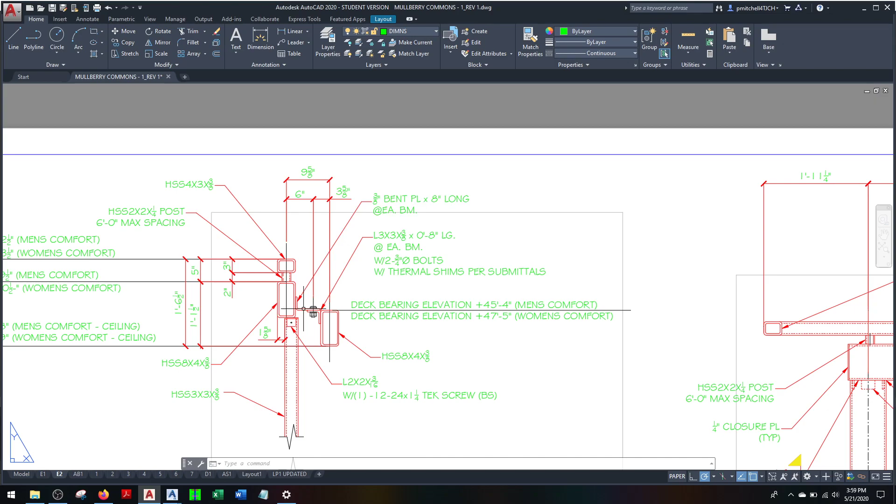I remember this one because they had a complicated thing right here. The way they designed this and the elevations with all the different tubes and bent plate angles and the little stub, it was confusing. But it was pretty intricate. It was all tube frame steel, everything was tubes.

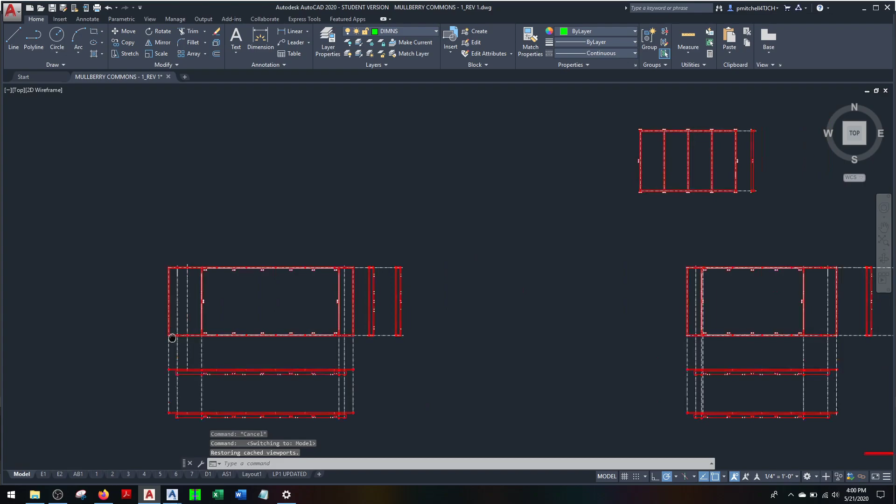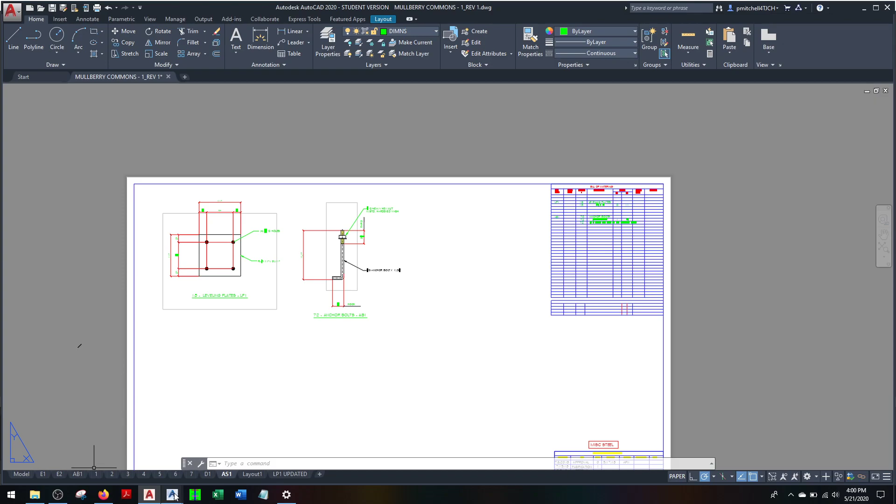I'll just zoom around a little bit. I had another one. Oh well, the 3D modeling.

This was a baseball field. Again, I was getting myself acclimated with doing the modeling.

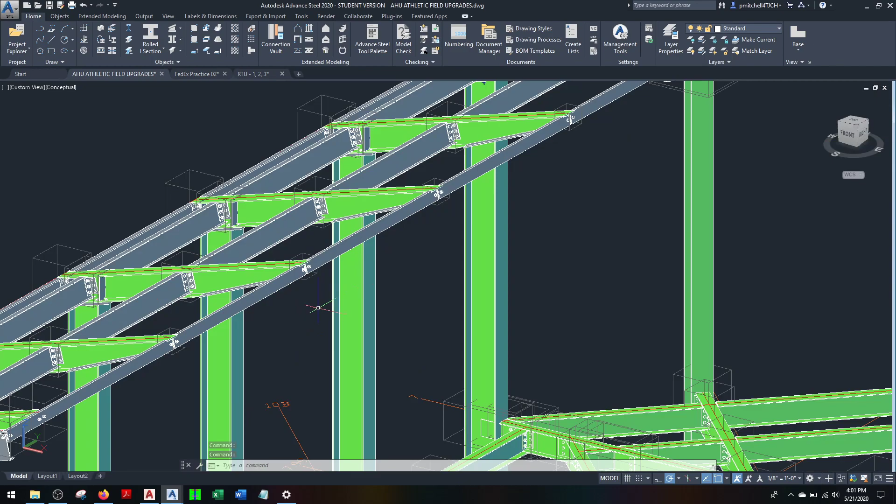This was one of the universities in New Jersey. They were building a new baseball field, so I thought I'd take a stab at modeling this thing. It was pretty interesting, definitely unique. A lot of custom connections, and the beams were beveled or spliced.

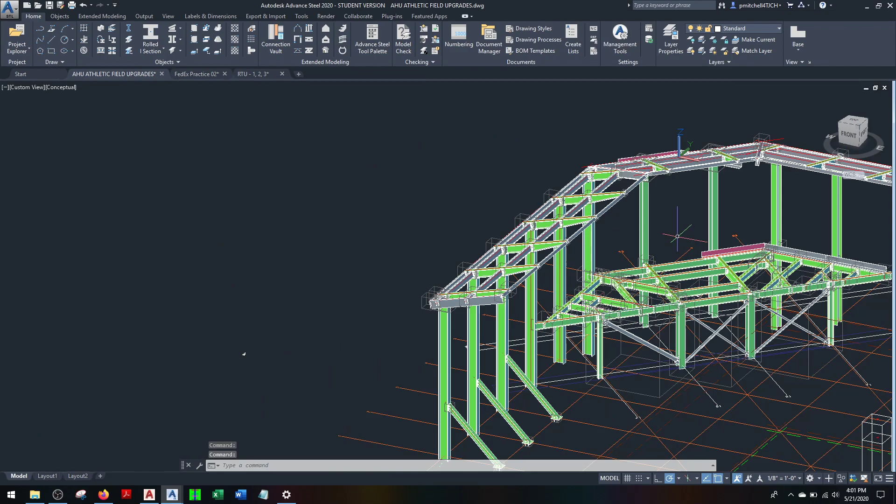I'm not sure what you're gonna call that. And then there's a plate welded at the end. And then I was trying to figure out, in the modeling, how do you have the bevel or the splice for the bent plate at these. I think it was like a 45-degree angle there. So this is what this was.

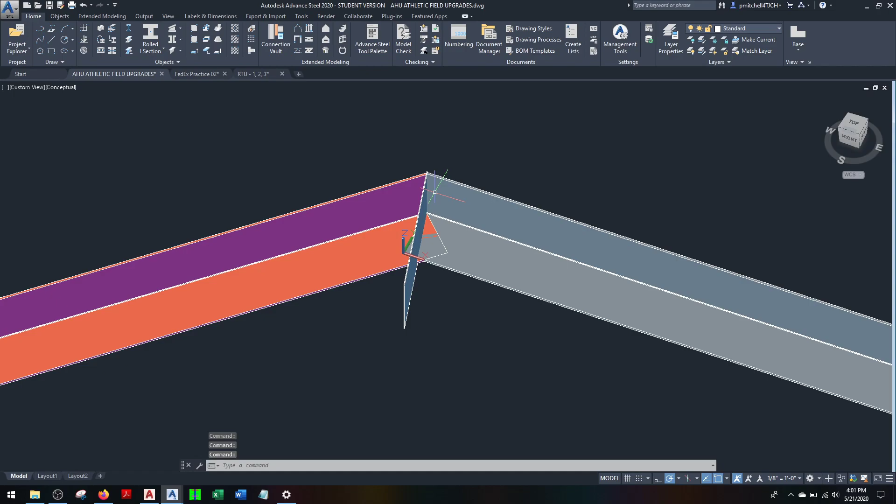I was trying to figure out how do you model that so that it cuts it. So I was practicing that.

This was definitely interesting. This modeling stuff is definitely fast. I mean, and I'm fairly novice at the modeling, this took me about roughly 8 hours or so to put together. And then, as you know, doing the piece mark drawings and the detailed drawings, it's a click away.

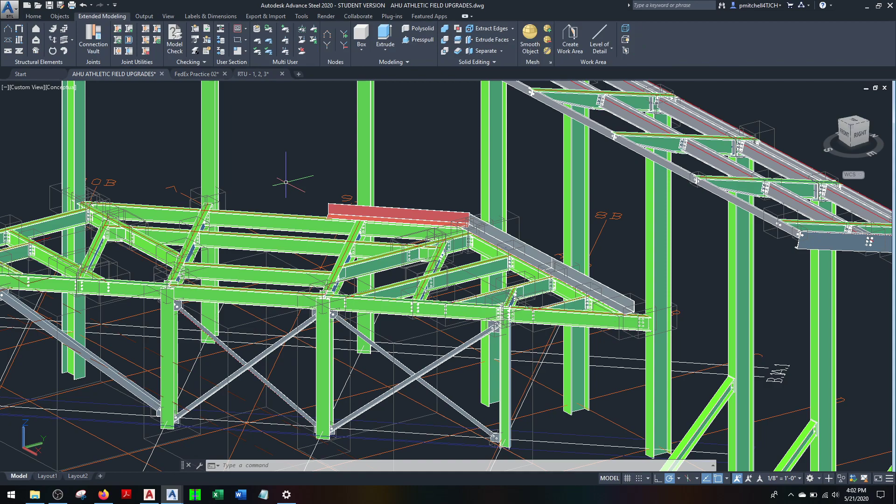But anyway, I won't take a whole lot of time. I'm just going to zoom around some things that were pretty unique with this thing.

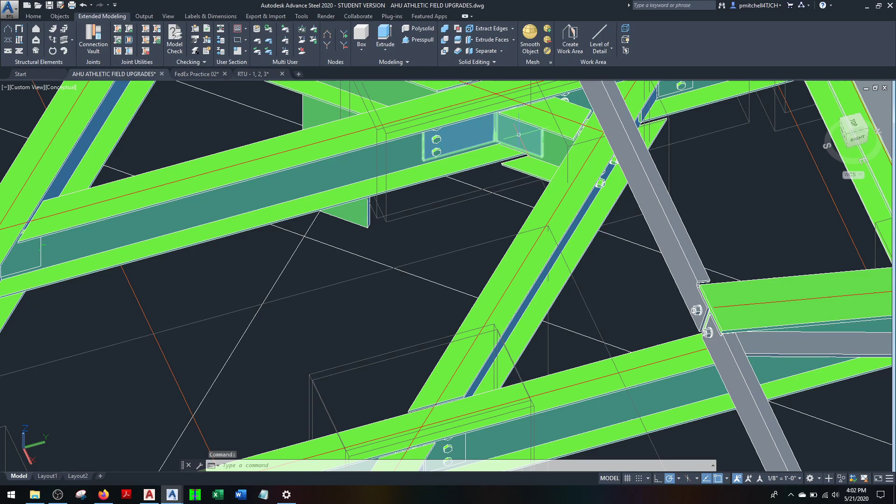All these angled beams, well, I put in it's all like bent plate connections there. Welded one side and bolted to the other.

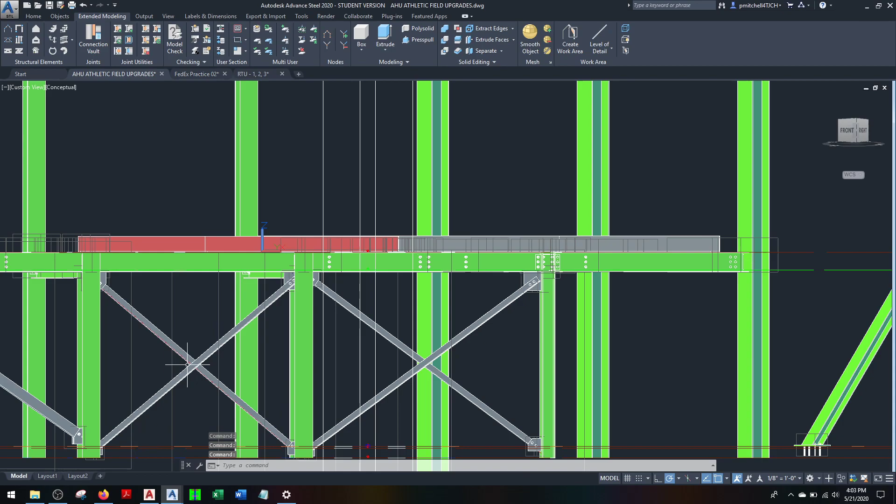And if you are familiar with these, the cross bracing is a very slick feature. And this is not a tutorial video, so I'm not going to explain it to you. I'm just going to zoom around. But that's one of them.

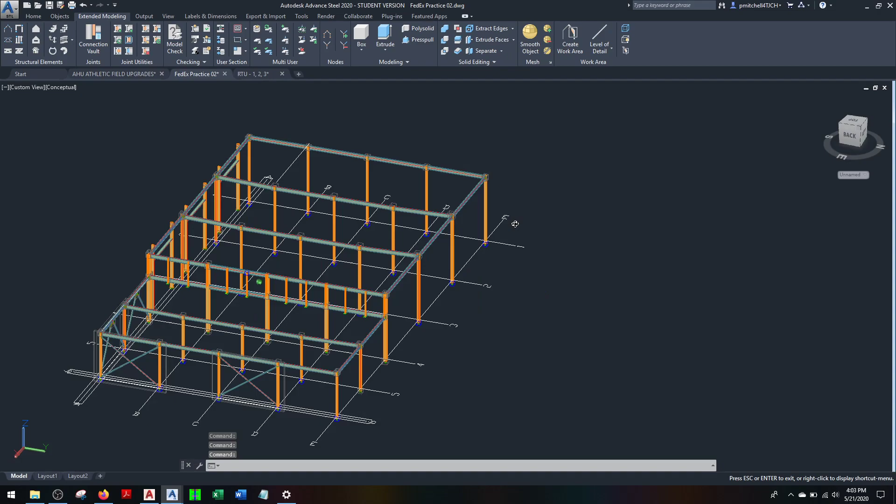Then here was a FedEx building, kind of at the airport, where trucks come in and out. There was 3 bays and an office building, and this had this custom connection here through plate to some angles. That was kind of neat doing that.

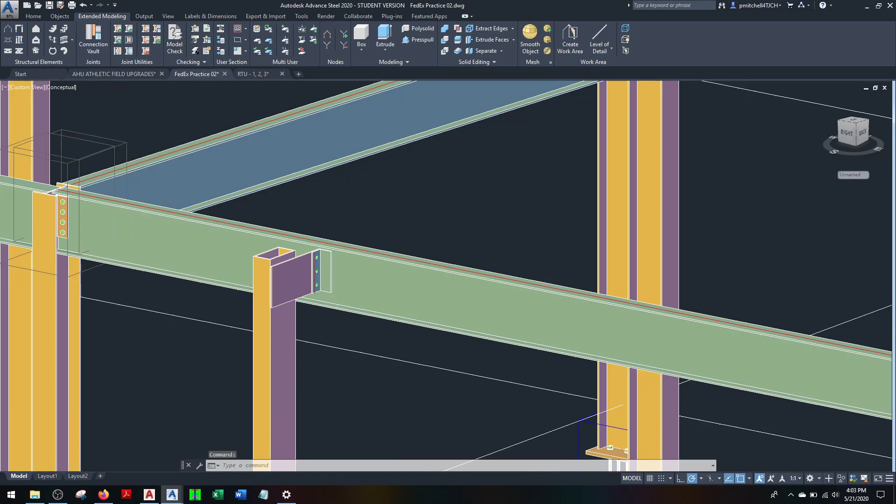I think these were the same or similar. And there's some more of this cross bracing, right there.

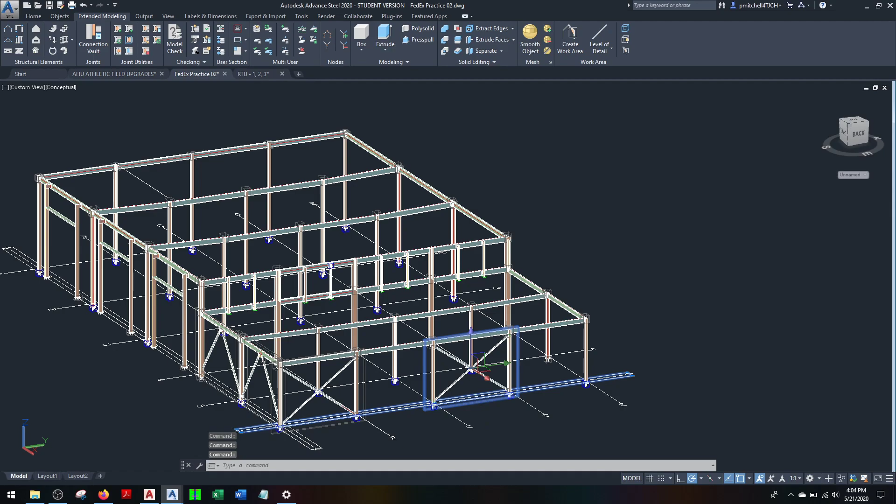Let's see what happens if I double click on this. Here's where you can select the different types. Let's see what happens here if I just mess around with this.

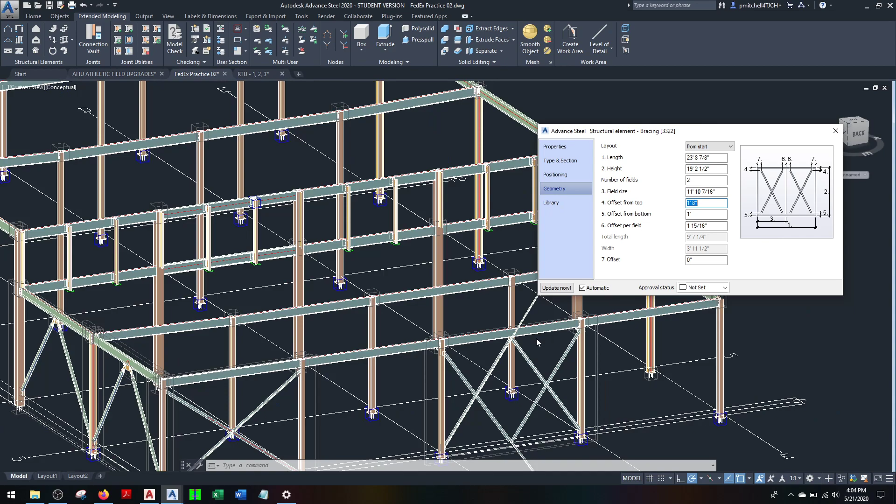Yeah, I was, this got screwed up. It's selecting points over here that it shouldn't.

Let's do a single. There we are. Single, we'll make this. It makes it a channel. And there you go.

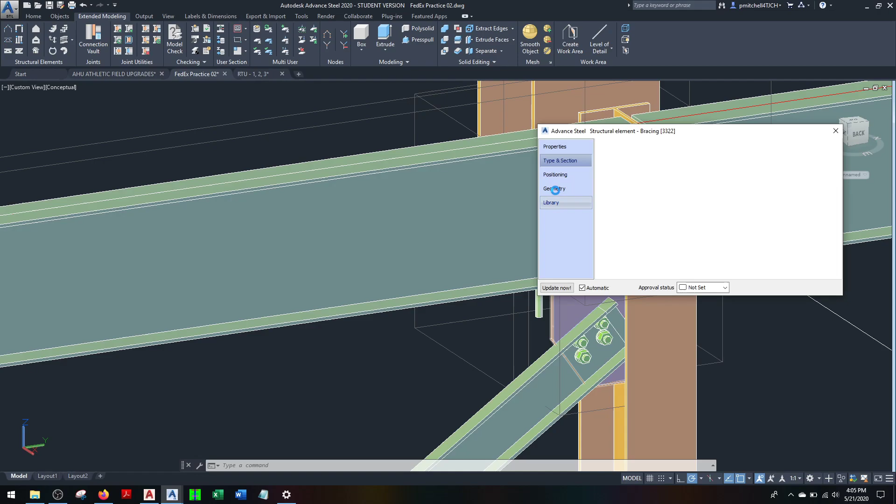I could change the bolt, the bolt size. I gotta change this gusset plate somewhere on here, I don't remember, but that's just how fast you can change things in these things. It's amazing.

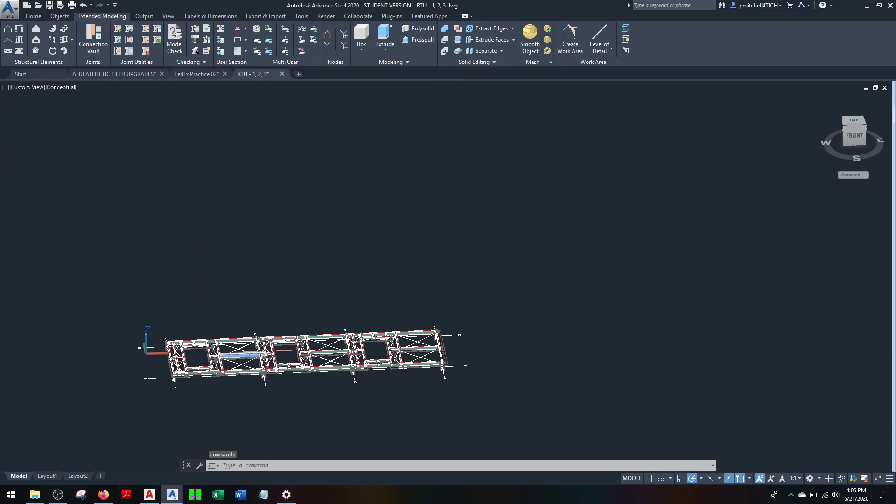Anyway, rooftop units, we used to do a lot of these. This one I took a stab at because I wanted to see how this thing did the connections for the cross bracing for the threaded rod.

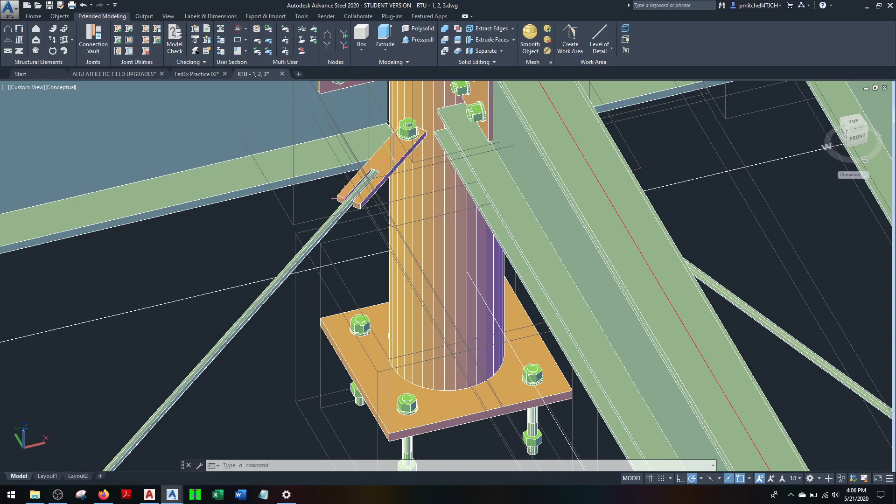It's not how it actually is, but that's the generic connection that comes out of the program. I was messing around with that, seeing how that worked, and this thing didn't quite come out the way I thought it would. This should be a through plate all the way through, but anyway,

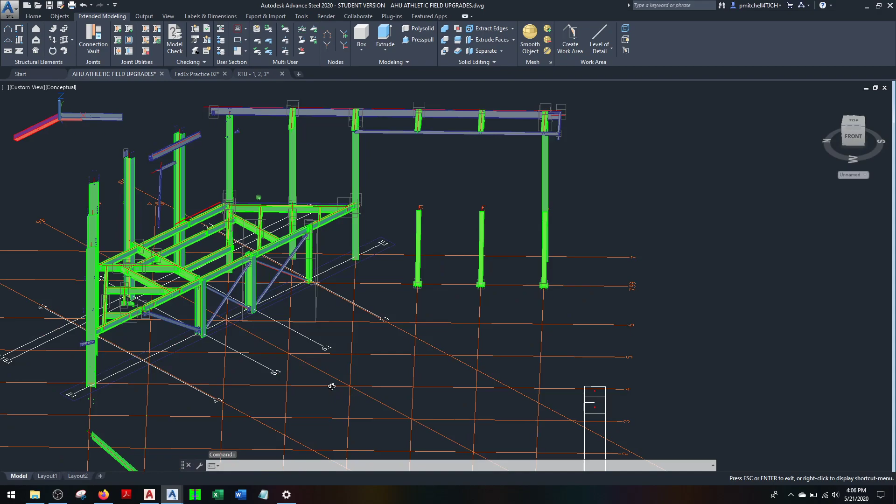That's about it. Just that's about it.